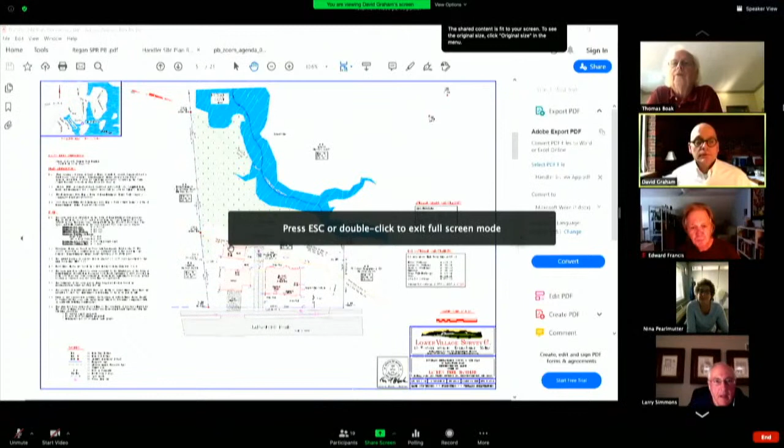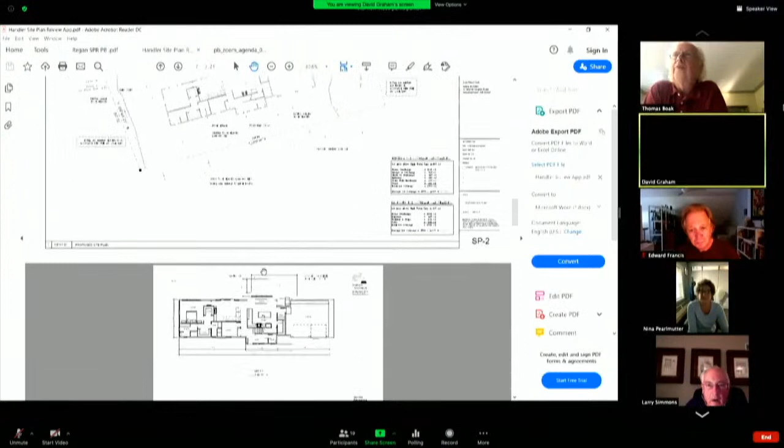Does everybody see the site plan? Okay, yep. So as mentioned, the project encompasses consolidating a number of buildings on the site into a single-family residence along Langsford Road. And as mentioned, we've located it to the greatest possible extent within the property line setbacks, as well as far back from the resource. Essentially that's the project.

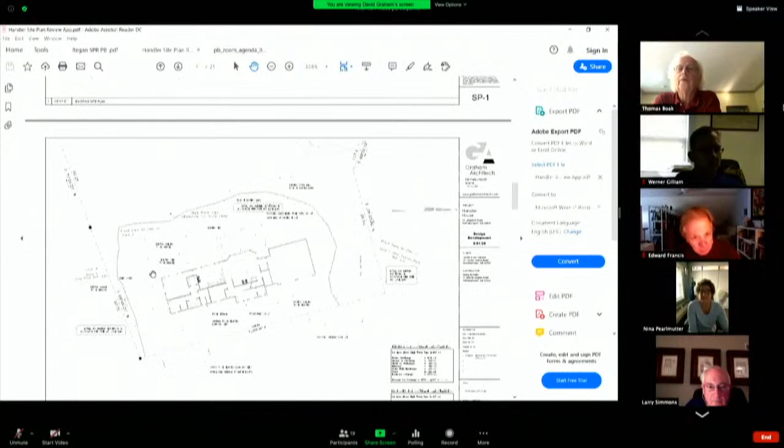There is a sewer easement on the property, as we discussed last time. The pump station is going to be removed, and the homeowner will take ownership of it, and it will be relocated adjacent to the proposed building site.

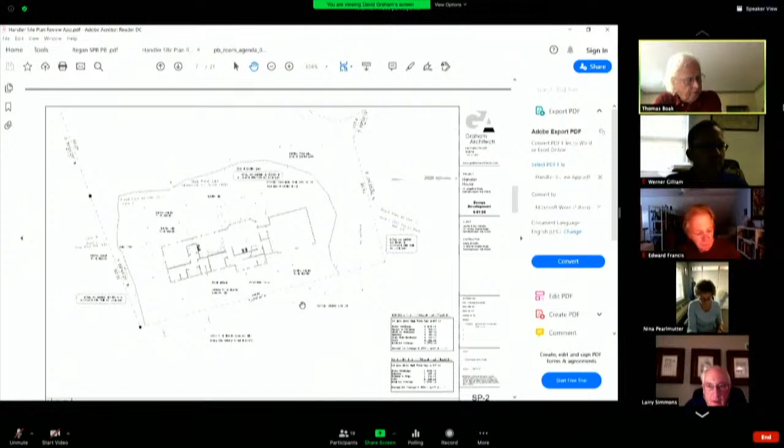Does anyone have any questions? I don't think we had anything from the last meeting, we were just continuing. The new square footage increase is 17.9%, and the volume is 21% bigger, so it's within the 30% limit in both cases. That's correct.

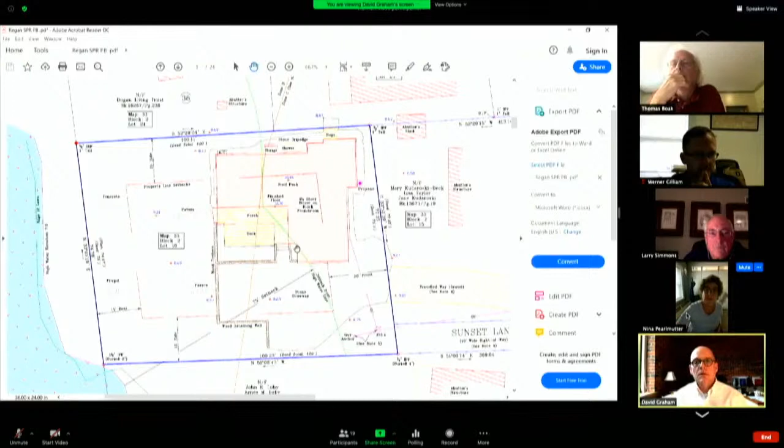is located in a number of different setbacks and areas on the property, a 75-foot setback as well as property line setbacks. In reviewing this early on with Werner, I looked at options for how I could feasibly relocate the house. The idea, the goal here, is to tear the house down, raise it on piers to get it out of the future floodplain, and rebuild it. Looking at the site, there really was no practical option for relocating it to the greatest extent possible, so we essentially left it at its current location, and then took into effect the options for expansion under the 30% rule in accordance with the land use ordinance.

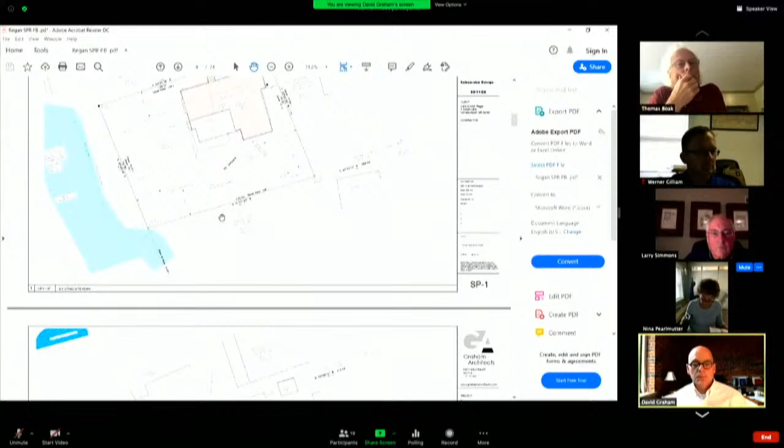The home will be occupied by the owners, and I've included in the package the floor plan and elevation drawings and the volume studies. I know there are a number of questions from the board—there's been a barrage of emails in the past couple days, so I'm happy to take this through the process and answer any additional questions, or go through the formulas for how I came through on the 30% volume expansion. I went through this with Werner yesterday, and I'm happy to show you my methods. I don't know how it will come across on Zoom, but I'll do the best I can.

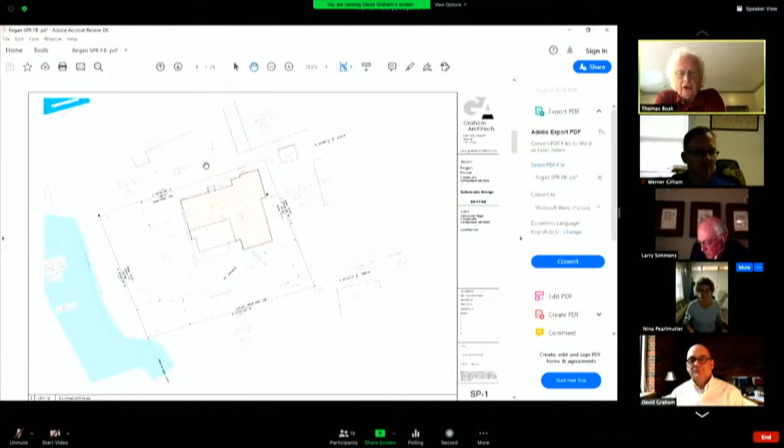Okay, the problem that I have—and I was talking to Werner today, and he says you'll somehow miraculously clear it up for me—is that on item 9 on your application, you very nicely break the interior square footage into the non-conforming and conforming pieces, and show that the non-conforming is under the 30%.

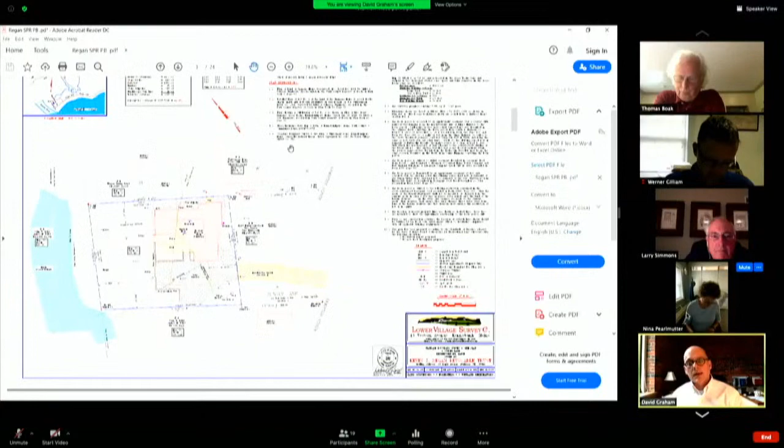Correct, you do not do the same on the volume. And since on the application, that's correct. Further, I will take you through how I've calculated the volume. So what I included in the package was a 3-dimensional computer model image of the existing home volume.

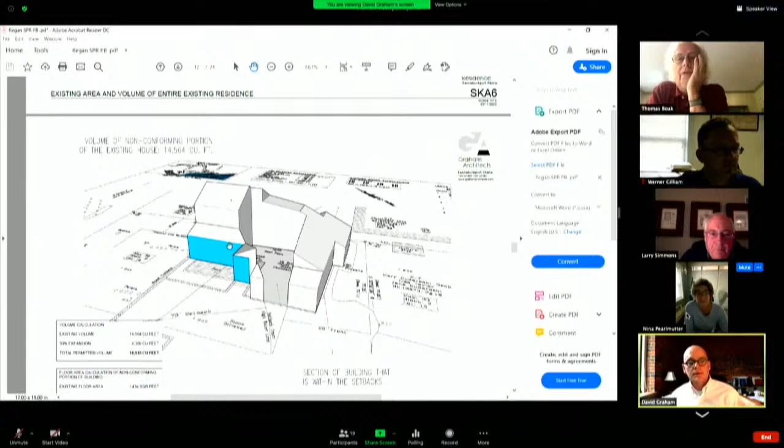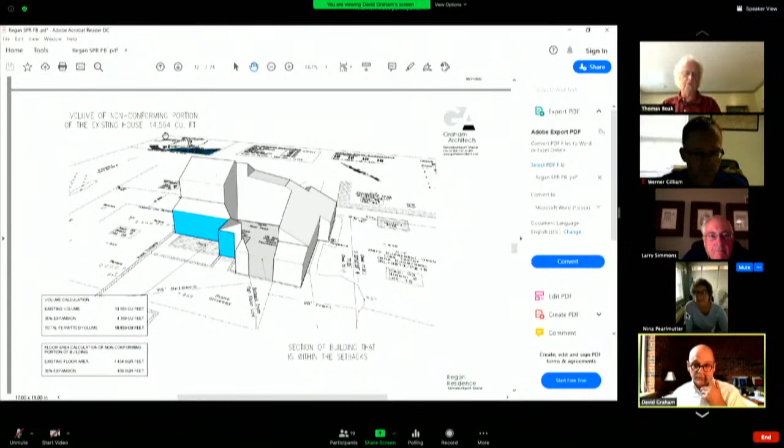The complicated part of this project is we have areas that are conforming and areas that are non-conforming. In this view, I cut away the conforming area and only focused on the non-conforming areas. The blue represents the covered porch, which is not included as described in the ordinance for calculating the volume of the house. This blue area is not included in the volume of non-conforming portions of the existing home, which I have at 14,564 cubic feet. I'd like to show you my methods.

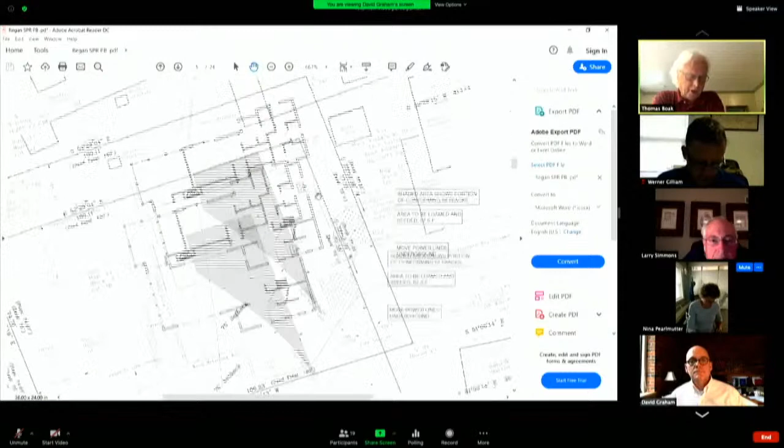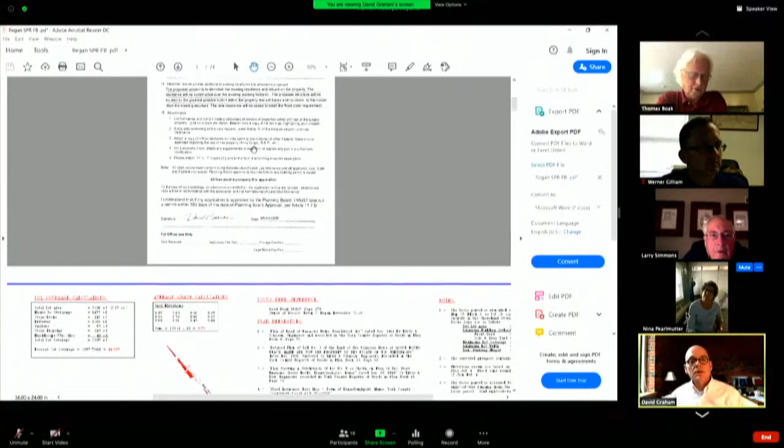So now you've further confused me. So the numbers on item number 10 are total garbage then? Item number 10 on the application? Yeah, I'm sorry, because what it currently says is the number you just gave me as non-conforming, it just gives me that as the existing. Right, that's where I think in my confusion in the application I did not distinguish the difference between existing non-conforming and existing conforming. Okay, what are those two numbers you're looking at?

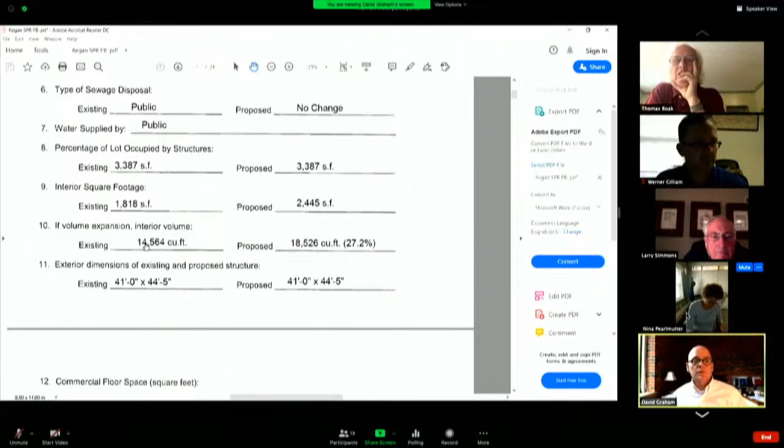This volume is the existing non-conforming volume. That's the existing non-conforming, correct. And this is the volume adding the 30% of this non-conforming volume, which yields 18,526. The whole house has more volume, but there's a section that's conforming, and I did not include that.

Okay, that's what it is, but whereas you did on item 9. That's right, I think I made an error by not including the addition, because I assumed that was everything. Yeah, that was the confusing part, I think, in the handler application where it was a similar situation. So I apologize for that, but okay.

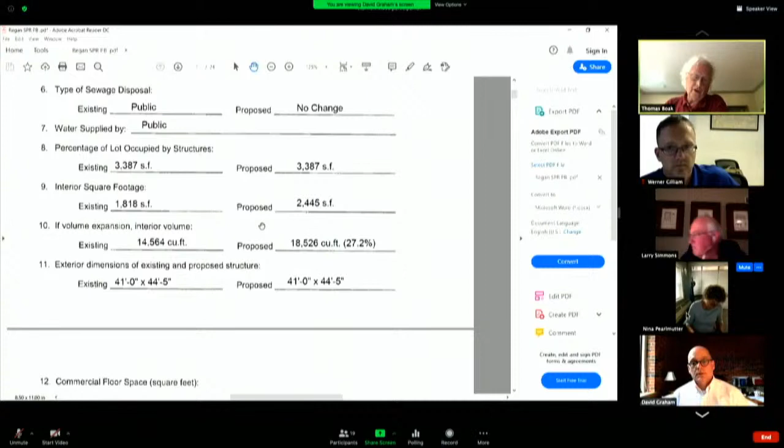So just for curiosity, what is the conforming? Do you know the conforming volume? I don't, I actually never calculated it. You only calculated the non-conforming. That's correct.

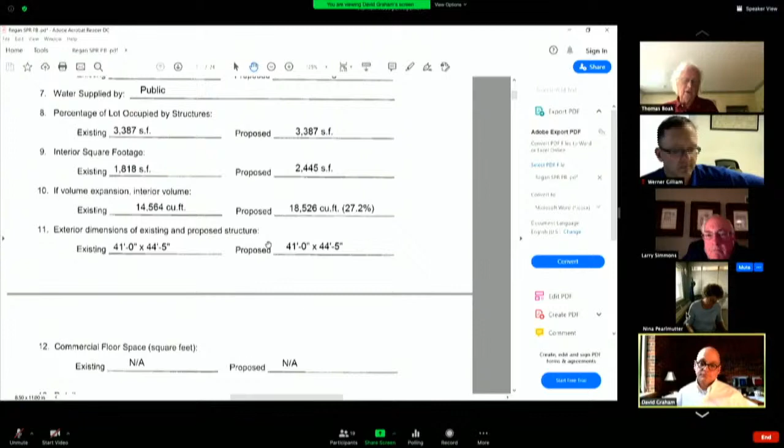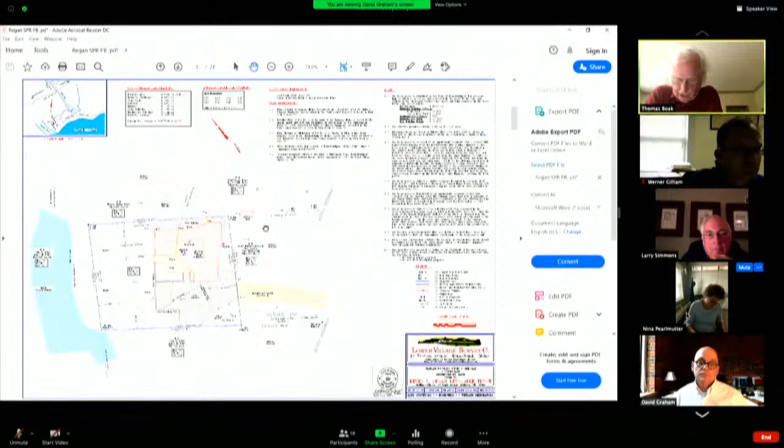All right, well that answers my question. Now, do you need me to go through it? I can happily go through how I got to the volume calculations if that's a question. I mean, it really wasn't. What was the question is when I compared your total square feet, I just inferred from the total square feet, I inferred, oh that, right.

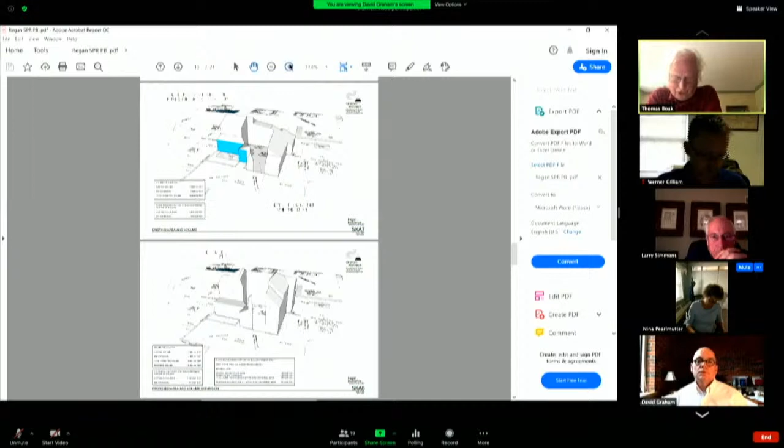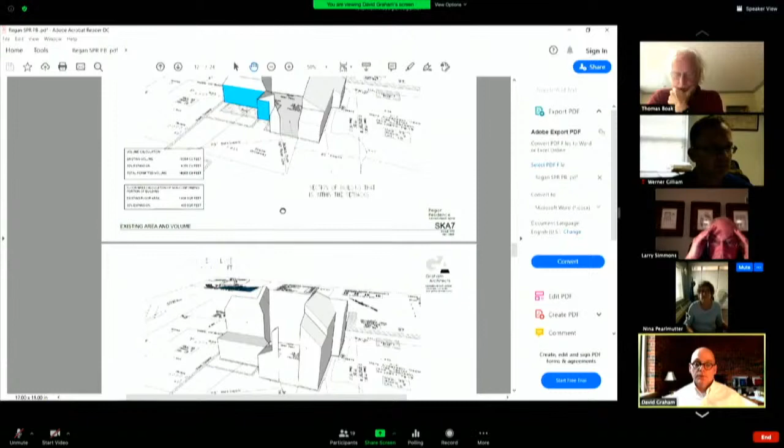That I was dealing with the total number down below, and in that case it would really be increasing by 37%. Right, 35% is what, right. So again, focusing strictly on the non-conforming area of the house and the future proposed house. Okay, the non-conforming volume or the non-conforming area? Both, I've done both. So in this particular case I'm just pointing to the volume. What would have been clearer is if you just said existing non-conforming on everything and not bothered telling us what the conforming square footage was on item 9, then none of us would have been confused. I understand, okay.

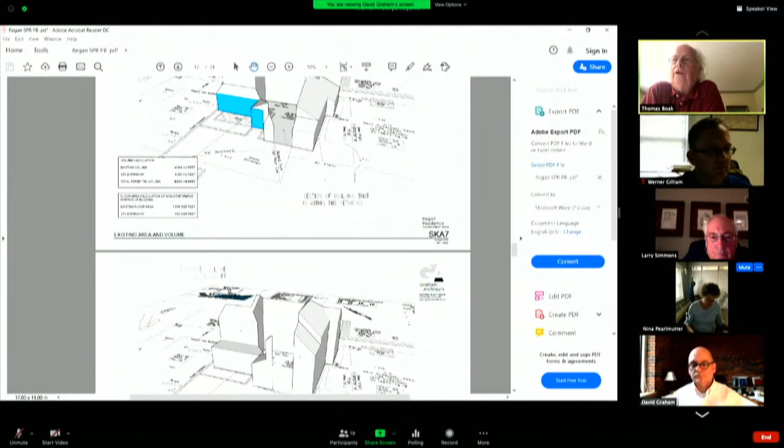All right, okay, do you want me to stop sharing? Yeah, please. Okay, so at this point I guess I'd like to, I've just taken the whole stage there, so any other planning board members wish to discuss this before we reopen our public hearing?

We can, we talk about the letters that have been received? You just talked about there's been a barrage of emails. I know I got one letter. Can we say something about what the others might be? We've gotten one letter twice, the same person, and I think any other barrages were by words of Mr. Gilliam. We had one ahead of last week's, not the last planning board meeting, that was 3 weeks ago. And then we've received one since then. Yes, that's correct. I'm worried that I've missed something.

No, I'm sorry, I was copied on emails from neighbors expressing their positive reaction to the application. I assumed... No, I haven't seen those. We don't have those. Okay, I'm sorry. No, it's good to know. That was my barrage of emails, at least. Okay, we just got bad news, the only one we got.

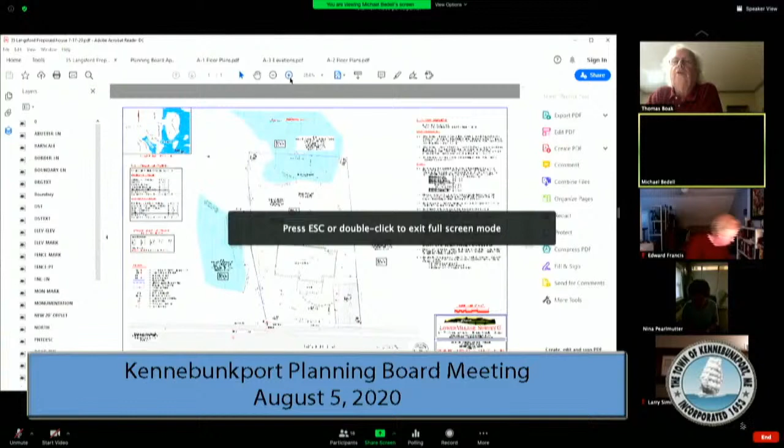So what we have here is a residence at 15 Langsford Road, which is a basic wood frame structure, non-conforming on the left-hand side in what used to be a garage area. What we're proposing is to tear down the existing structure, make it less non-conforming, and use the 30% expansion rule to increase the volume. Although we can't make it less non-conforming to the 75-foot high water setback, we did make it now conform to all of the building-to-property setbacks.

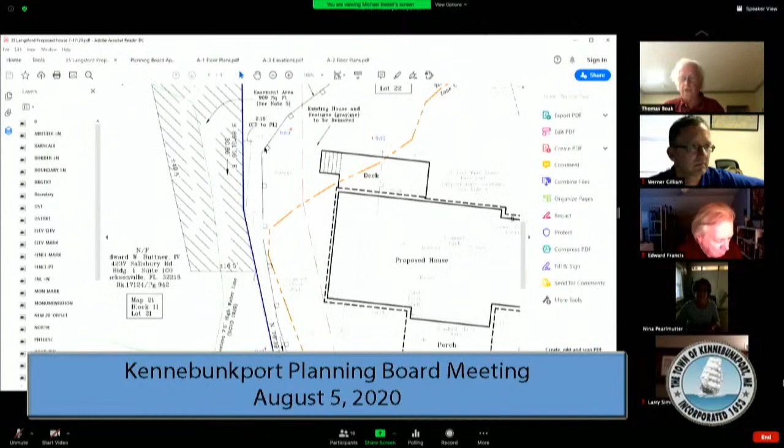Okay, and you also eliminated the little building in the back too? Yeah. This lightly shaded area is the existing building on the left-hand side, and the porch and whatnot—that's all going to be removed. The other thing also being removed is in the back portion of the property: there's an existing guest cottage and covered porch area over the right-hand property side setback here.

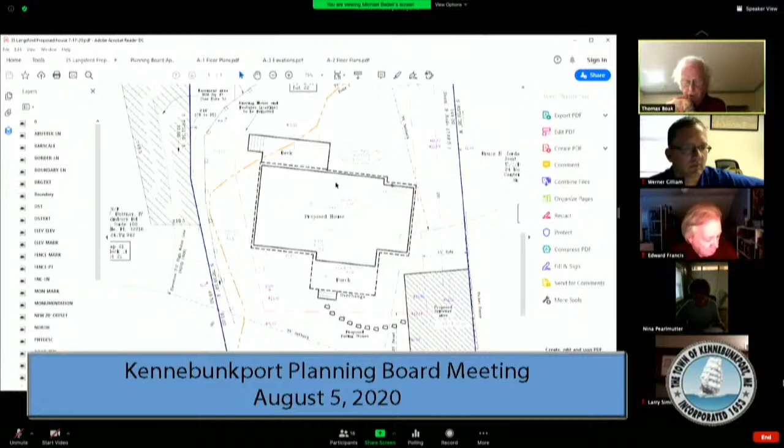And much closer to the 75-foot setback from the high water. So basically the whole thing is still in the 75-foot setback—almost the entire project, even though we're taking down the existing guest cottage and removing this entire wood frame structure. The only portion of the project that's actually conforming to the setbacks is this tiny little portion right here, which basically conforms to the current zoning.

Okay. All right, so I guess we can—you've got the numbers and everything in here. I have a couple of questions on this. One, do you have somewhere on the plan where you show the silt fencing for the work you're going to be doing?

That kind of came up during the last planning board meeting, and what I had done is on this new site plan I had Lower Village go back and show the proposed silt fencing to be installed here. You can see it along this back line and across this left property boundary, to make sure none of the construction debris or runoff makes it to the resource. Okay, I'd like to see that corrected survey filed.

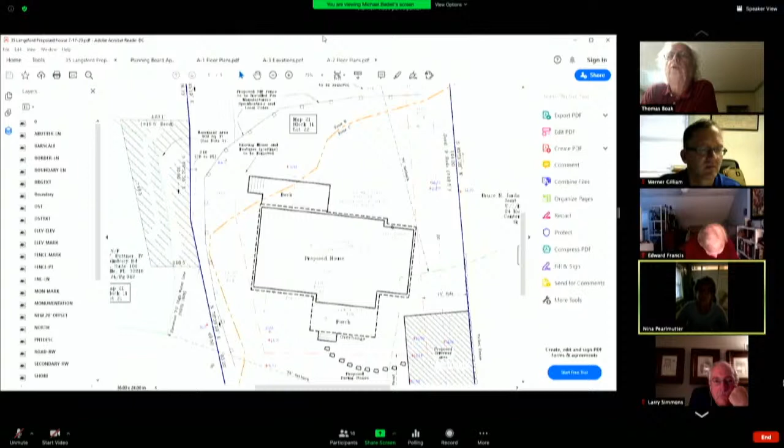The other question I had was, you say this is in a partial flood zone, but when I look on the maps, it looks like it's completely in a flood zone. Right, I believe it is in a flood zone, and we did go back and forth with Werner on this to set the elevations where they need to be. According to Werner, the new base flood elevation will be at 12.0 feet, so that's where we ended up.

We left 1.3 feet to the bottom of the structure, and another foot for the structure, so the first floor subfloor is now at 14.25 feet. We worked back and forth with Werner, and set the new base flood elevation at 12.0 feet. Instead of leaving just an additional 1 foot above that to the bottom of the structure, we left 1.3 feet for extra room, setting our first floor subfloor at 14.25 feet, which is actually 2.3 feet above the base flood elevation.

Okay, so I'll give the planning board a little bit of the spiel that I usually give applicants whenever we talk through this process. Mike, if you can leave your survey up, this is a great example for folks to look at. Can you see it, Werner? Yeah, I can see it fine.

So right now you're looking at a plan. You see this zone B and zone C on the map here. What you're actually looking at is an interpretation of the current flood maps, the old current Z-fold paper maps, which aren't digitized, not meant to be brought into a digital world per se. But surveyors in Lower Village have been doing this for quite some time, and they're able to do a pretty good job giving folks an idea of where those zone boundaries would fall on the face of the earth.

So in some cases, for zoning purposes, you'll hear flood maps being used as an exhibit in a zoning map. For instance, here in Kennebunkport, resource protection is the coastal floodplain, so these types of lines might wind up being used for showing where an RP zone is.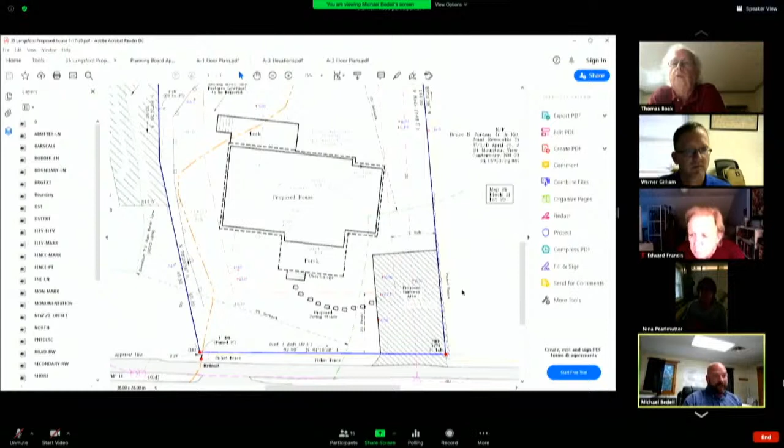You say there's a sewer easement on the property that's going to be relocated to a location agreed by the property owner and the town. So it is going to be relocated on the property. The easement stands now where there's a sewer pump cover back here and this 10-foot easement that comes back. I spoke with Chris Simeone after the last meeting, and basically the owners are going to give this pump back and buy a new one. Then we're going to relocate this pump and the connection, working with the town public works to figure out the best possible location for it.

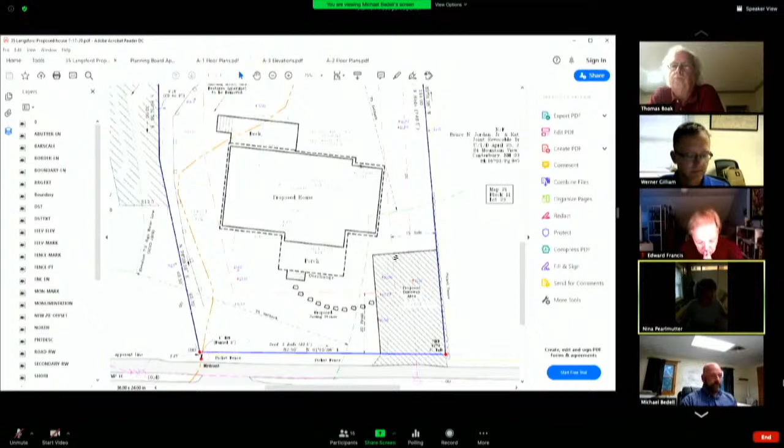Okay. The only other question I had was, I think you need to redo your front page because you have the owners at your address.

I'm sorry, where do you see that? On the front page of your application, the owner's address is your address as well, I believe. Oh wait a minute, I'm sorry, you've got them at 35 Langsford Road. Are they living there now? So they live there basically part-time, I don't believe it's their permanent residence. But I can change that to be whatever their permanent residence is, if that needs to happen. Yes, okay.

Okay, any other comments from the board before I open up the initial public hearing? Well, this is Larry, I just wanted to say I appreciate the efforts of Werner and the applicant to consider the impact of the floodplain on the elevations you're proposing for the house. This is not a simple topic, and there's a bunch of information out there that could be considered, but I appreciate you trying to adjust the elevations for the long term, for the benefit of the owner.

Okay. So let me open up the public hearing. Is anyone out there waiting to be heard? They'll raise their hand.

Please, yeah, this is Bruce Jordan again. Finally got on the right piece of property. Yeah, so we're right next door to Brian and Michael.

My first question, I think you just answered, was it looked to me like you're doing the best you can to situate the new property within the setback limits, but apparently some of that property is going to be not within the setback limits, correct? Did I hear that correctly, the new house? So it still has the 75-foot wetland setback.

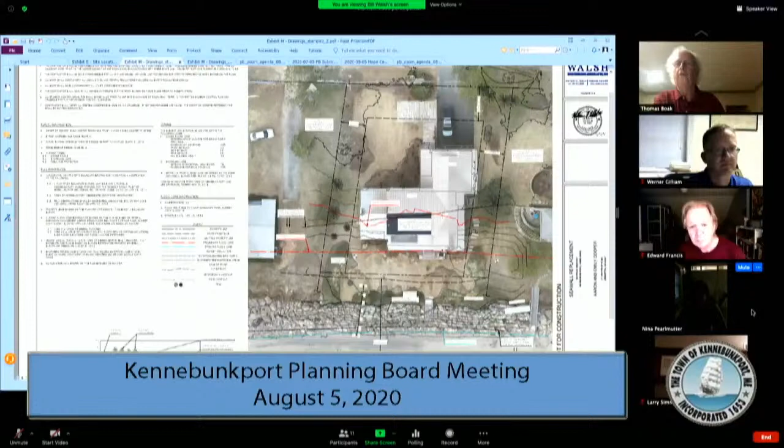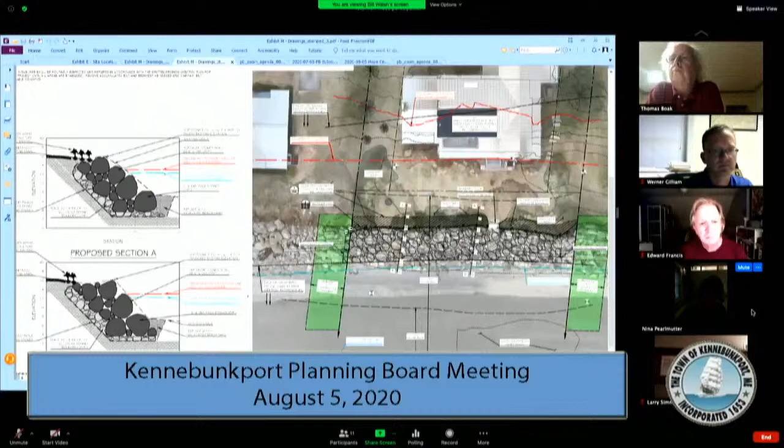So we are planning simply to take the revetment - just to orient you, Kings Highway's up on the top of the page, Goose Rocks Beach is down at the bottom of the page, and this is the revetment. It's about 100 feet wide. The idea will be to take this - it'll be constructed sort of piece by piece. We'll take apart pieces of the revetment and replace them with larger stones.

What we have observed and figured out is that the stones that exist in there - back to this photo, as you can see, some of these are just too small. They really don't handle the force of the waves very well. And what we are also putting behind this will be a geotextile fabric that will help mitigate any sand movement from and through the wall as the waves beat against it.

This is a permit by rule action. We do still have a permit by rule that is still valid from the original application that we did, so that one is in place. And I think with that, it stands pretty much as it did last time - same idea, and they anticipate going ahead with this probably once we get into the late fall, early winter season. So be happy to answer any questions.

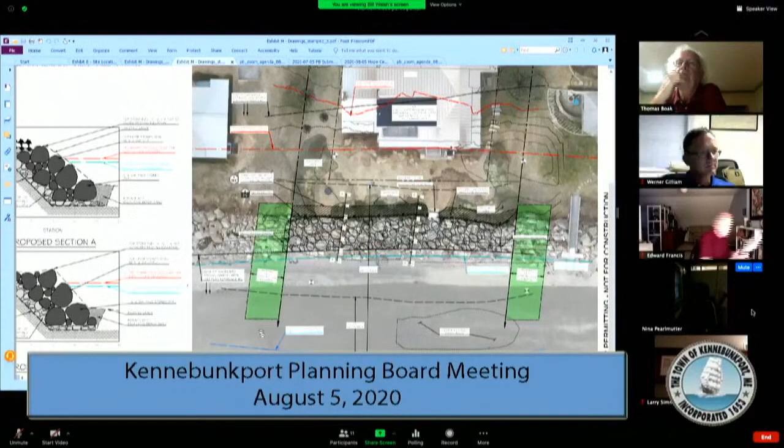Okay, any questions? So this is Larry. Mr. Walsh, thanks for making that presentation.

So the whole idea is remove the existing rocks and replace it with an improved stone seawall, essentially, right? Yes, exactly. As many of the large stones that can be saved will be saved and reused, probably as the face stones, if you will. But what we really need are larger, more massive stones in that wall.

And I recall last time there was an issue about access. You were going to try to use some right of way between the two houses or something. Is this still okay? Yes, there's an access a couple houses down that we anticipate we'll be able to use for this. We have to work that through with the neighbors, but the owner's been in contact with them and is talking through that right now.

So all of the work will be done from the land side. You're not going to have a barge offshore. No barge. Yep, all from land.

And so the original approval expired just because they didn't want to work through the winter or something? Yeah, they just decided not to do it, and we ended up recording the approval, but since the work was not done or the building permit not taken, it expired. Okay, so it's just no change, just a repeat of the existing. Okay, thank you.